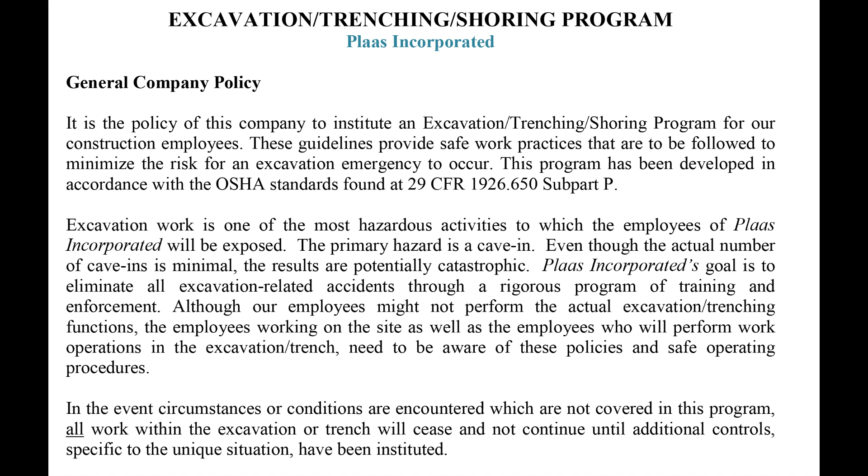Training and education. All job foremen, competent persons, and employees must understand their responsibilities regarding safety. Before beginning work, all employees will be trained in the recognition of potential hazards and precautions to be taken. This training will include safety requirements and procedures expected on the job site. Records of this training must be documented and retained in the Manager of Safety's office at Plaas Incorporated.

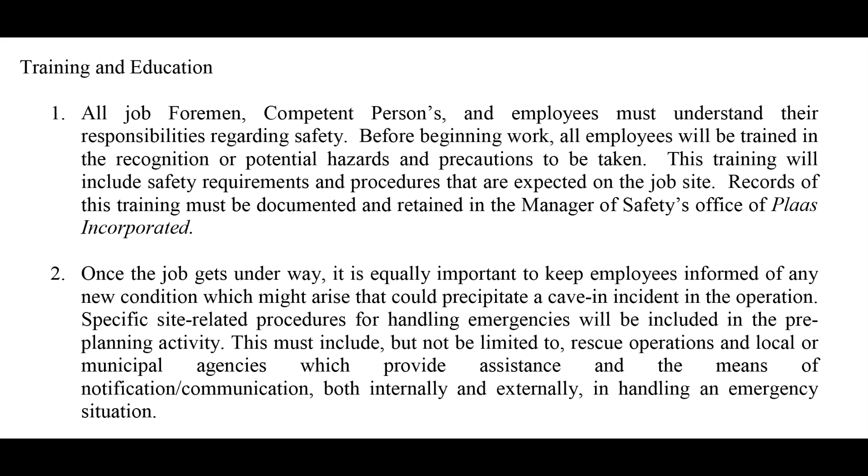Once the job gets underway, it is equally important to keep employees informed of any new condition which might arise that could precipitate a cave-in incident. Specific site-related procedures for handling emergencies will be included in the pre-planning activity. This must include, but not be limited to, rescue operations and local or municipal agencies which provide assistance, and the means of notification and communication, both internally and externally, in handling an emergency situation.

Competent person. The designated competent person should have and be able to demonstrate the following: training, experience, and knowledge of soil analysis, use of protective systems, and requirements of 29 CFR Part 1926 Subpart P.

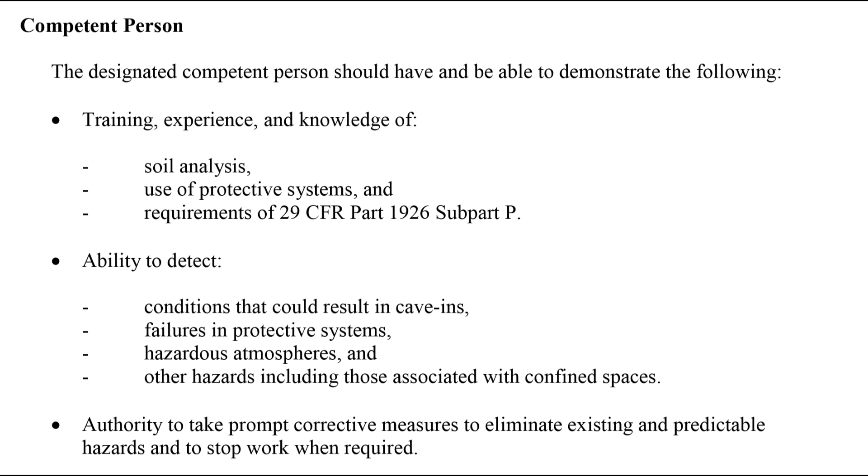Ability to detect conditions that could result in cave-ins, failures in protective systems, hazardous atmospheres, and other hazards, including those associated with confined spaces. Authority to take prompt corrective measures to eliminate existing and predictable hazards and to stop work when required. The competent person, as a tool to ensure all aspects of excavation trench safety are being addressed, may use the Plaas Incorporated Trench Excavation Review Daily Excavation Checklist and/or the Soil Analysis Checklist forms.

Site excavation trench inspections. Site excavation trench inspections shall be made by a competent person and should be documented. The following guide specifies the frequency and conditions requiring inspections: daily and before the start of each shift, as dictated by the work being done in the trench; after each rainstorm; after other events that could increase hazards, for example, snowstorm, windstorm, thaw, etc.

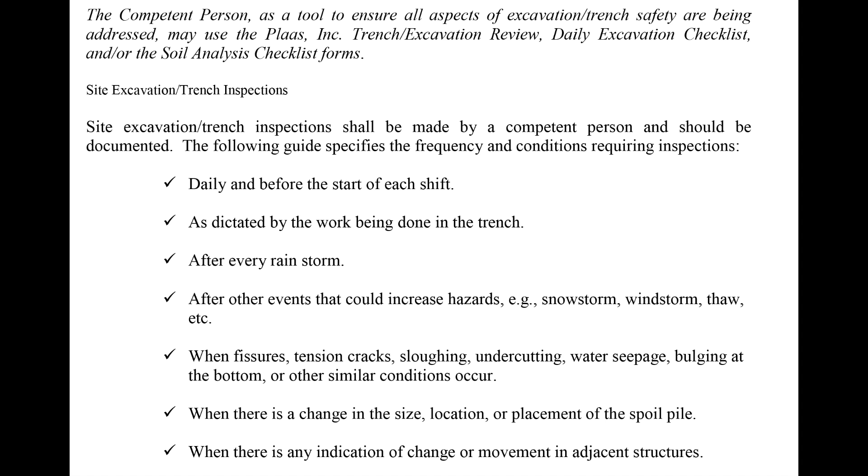When fissures, tension cracks, sloughing, undercutting, water seepage, bulging at the bottom, or other similar conditions occur; when there is a change in the size, location, or placement of the spoil pile; when there is any indication of change or movement in adjacent structures.

Soil classification. The types and composition of soil must be identified to determine what protective measures must be undertaken. Types and compositions such as wet soil, sandy soil, or ground that has been previously backfilled should be considered relatively unstable and deserving of strong support.

Strata considered hard rock can sometimes contain faults which make it unstable when disturbed by jackhammer activity or other types of vibrations, such as vehicular movement. Therefore, soil should be classified as stable rock and three classifications of soil.

Type A soil is a cohesive soil with an unconfined compression strength of 1.5 tons per square foot. The maximum allowable slope for excavations less than 20 feet deep is three-fourths to one, or 53 degrees. Examples: clay, silty clay, sandy clay, or clay loam.

Be cautious on soil that is fissured, subject to vibration, heavy traffic, pile driving, soil that has been previously disturbed, or soil that has been sloped.

Type B soil is cohesive with an unconfined compression strength greater than half a ton per square foot but less than 1.5 tons. The maximum allowable slope for excavations less than 20 feet deep is 1:1, or 45 degrees.

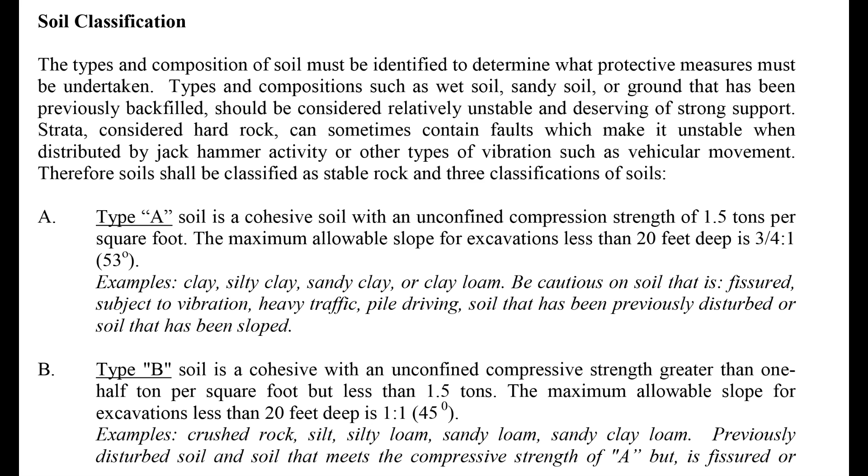Examples: crushed rock, silty loam, sandy loam, sandy clay loam, previously disturbed soil, and soil that meets the compressive strength of Type A but is fissured or subject to vibration. Dry rock that is not stable, or material that is part of a sloped system, fits this classification.

Type C soil is a granular soil with an unconfined compressive strength of half a ton per square foot or less. The maximum allowable slope for excavations less than 20 feet deep is 1.5:1, or 34 degrees.

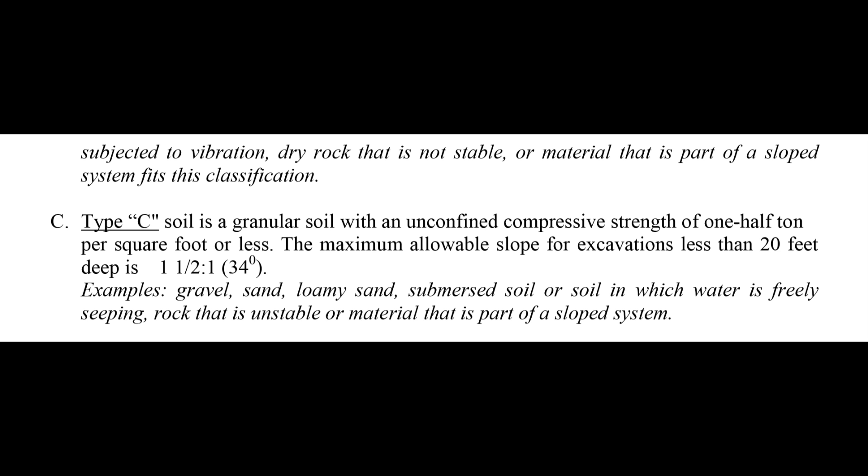Examples include gravel, sand, loamy sand, submerged soil, or soil in which water is freely seeping, rock that is unstable, or material that is part of a slope system.

Test equipment and methods for evaluating soil type. Many kinds of equipment and methods are used to determine the type of soil prevailing in an area. They are described below, starting with the pocket penetrometer.

Penetrometers are direct reading, spring-operated instruments used to determine the unconfined compressive strength of saturated cohesive soils. Once pushed into the soil, an indicator sleeve displays the reading. The instrument is calibrated in either tons per square foot (TSF) or kilograms per square centimeter (KPA). However, penetrometers have errors ranging from plus or minus 20 to 40%.

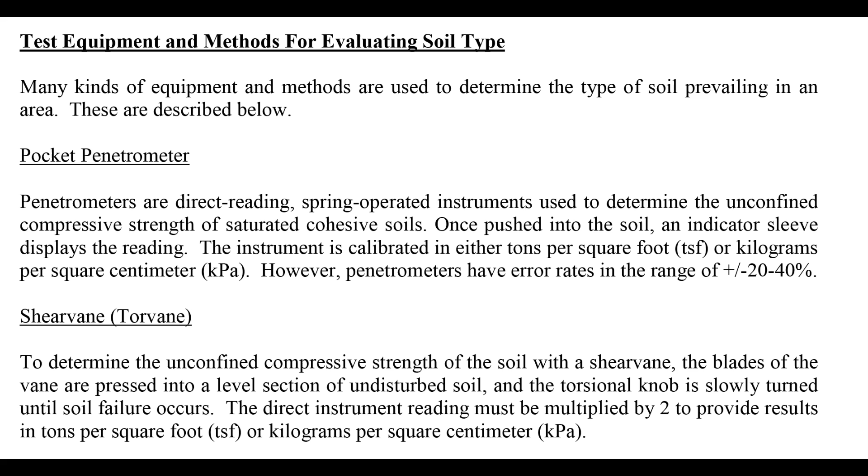Shearvane, or Torvane: to determine the unconfined compressive strength of the soil with a Torvane, the blades of the vane are pressed into the level section of undisturbed soil, and the torsional knob is slowly turned until soil failure occurs. The direct instrument reading must be multiplied by 2 to provide results in tons per square foot (TSF) or kilograms per square centimeter (KPA).

Dry strength test. Dry soil that crumbles freely or with moderate pressure into individual grains is granular. Dry soil that falls into clumps that subsequently break into smaller clumps, and the smaller clumps can be broken only with difficulty, is probably clay in combination with gravel, sand, or silt. If the soil breaks into clumps that do not break into smaller clumps and can be broken only with difficulty, the soil is considered unfissured unless there is visual indication of fissuring.

Plasticity or wet thread test. This test is conducted by molding a moist sample of soil into a ball and attempting to roll it into a thin thread approximately 1/8 inch (3 millimeters) in diameter by 2 inches (50 millimeters) in length. The soil sample is held by one end. If the sample does not break or tear, the soil is considered cohesive.

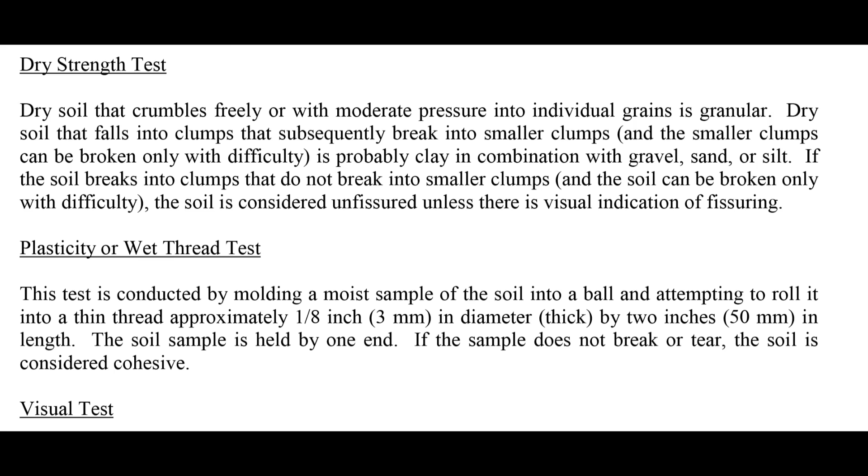Visual test. A visual test is a qualitative evaluation of conditions around the site. The entire excavation site is observed, including the soil adjacent to the site and the soil being excavated. If the soil remains in clumps, it is cohesive. If it appears coarse-grained, sand, or gravel, it is considered granular. The evaluator also checks for any signs of vibration.

During a visual test, the evaluator should check for crack line openings along the failure zone that would indicate tension cracks, look for existing utilities that would indicate the soil has previously been disturbed, and observe the open side of the excavation for indications of layered geological structuring. The evaluator should also look for signs of bulging, boiling, or sloughing, as well as signs of surface water seeping from the sides of the excavation or from the water table.

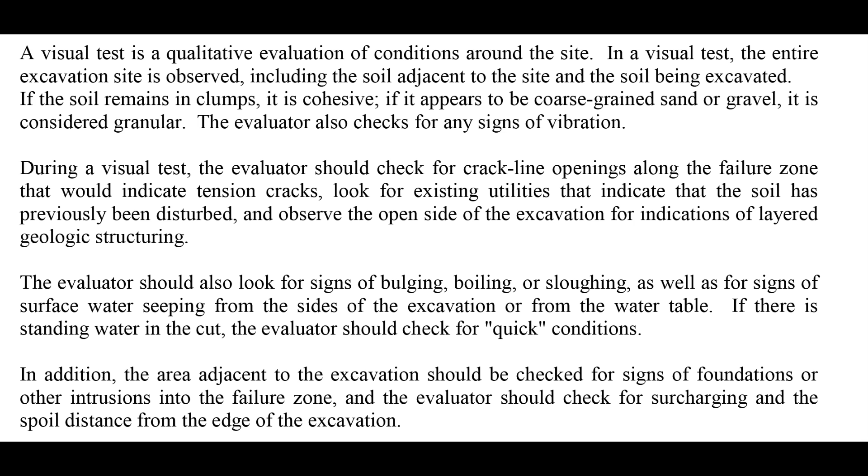If there is standing water in the cut, the evaluator should check for quick conditions. In addition, the area adjacent to the excavation should be checked for signs of foundation or other intrusions into the failure zone, and the evaluator should check for surcharging and the spoil distance from the edge of the excavation.

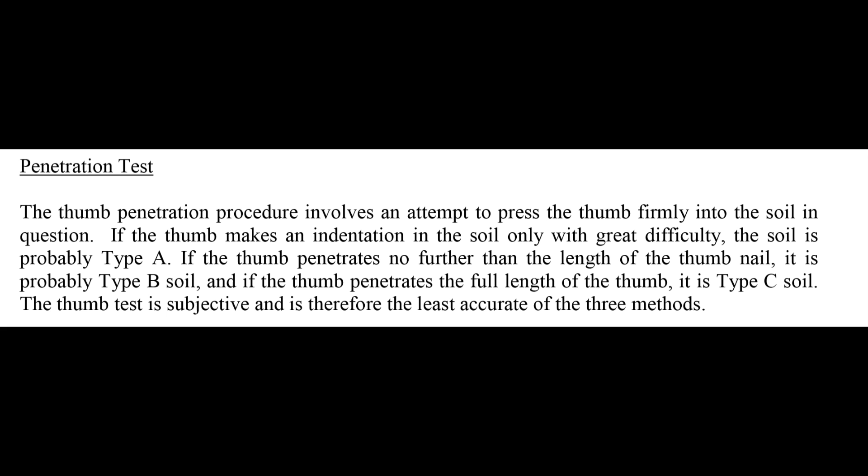Penetration test: the thumb penetration procedure involves an attempt to press the thumb firmly into the soil in question. If the thumb makes an indentation in the soil only with great difficulty, the soil is probably type A. If the thumb penetrates no further than the length of the thumbnail, it is probably type B soil. If the thumb penetrates the full length of the thumb, it is type C soil. The thumb test is subjective and therefore the least accurate of the three methods.

Excavation safety considerations. Each excavation and trenching job presents unique problems. Prior to excavation work activities beginning on a job site, the following items and conditions are to be addressed. Surface and groundwater: the amount of water, either surface or contained within the soil, can affect the cohesiveness of the material. It is imperative that the water table and its extreme fluctuations be determined prior to starting the operation.

Underground installations. The location of underground installations such as sewer, water, fuel, gas and oil, telephone, and electric lines will be determined before starting the trench or excavation work. It will be the competent person's responsibility to verify that utilities are marked. Hand digging will be required when in close proximity to utilities. Utility and service companies plus local officials will be contacted prior to the job to locate and mark all underground installations.

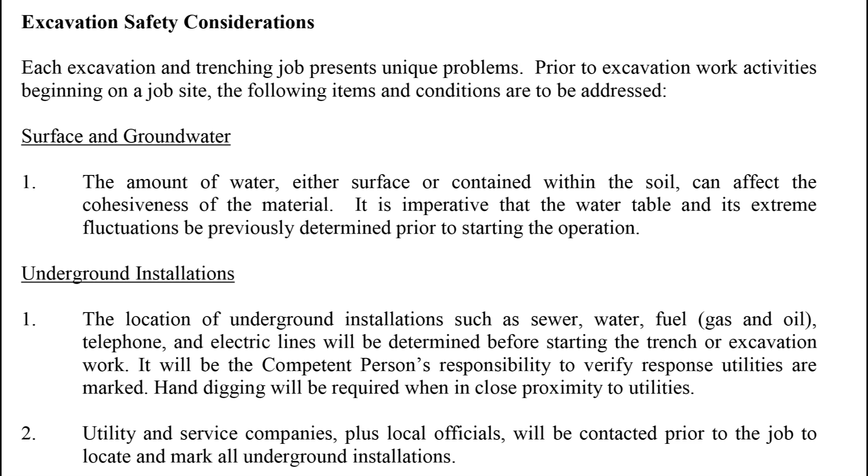Underground installations shall be protected, supported, or removed to safeguard employees.

Climate and weather conditions: changing weather and climate can drastically alter conditions encountered in excavation and trenching work. Potentials for change in weather and climate must be considered, including precipitation, temperatures, flooding, and any type of extreme weather conditions.

Physical location of dig: the nearness, type, and condition of any structures, installations, or operations will be determined prior to starting a job. If a potential for damage to adjacent structures is suspect, additional safeguards and procedures will be initiated to provide utmost protection.

Traffic conditions: through job site observation, the type, volume, and peak hours of traffic flow adjacent to the dig will be determined. The close proximity of passing vehicles can cause vibrations and sudden shock, which could contribute to cave-ins by loosening the soil.

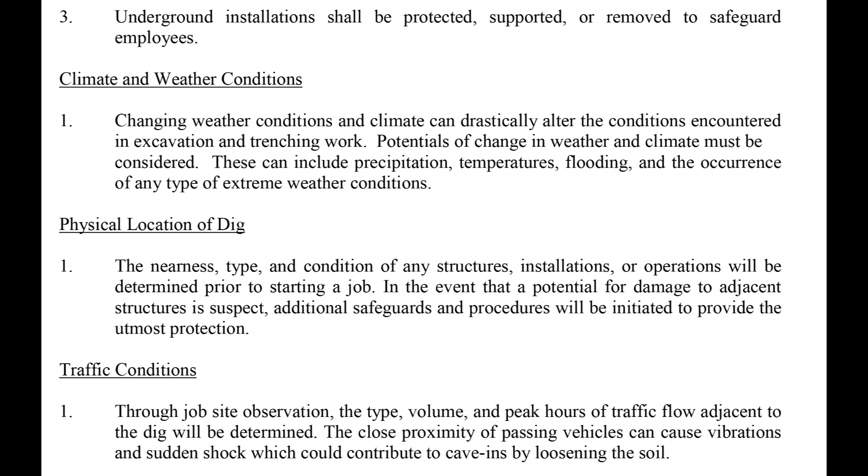General information: in the event these pre-planning activities identify a unique hazard to the job at hand, specific loss prevention procedures will be developed, put in writing, and included as an addendum to the requirements set forth in this section of the Safety Policy Manual.

Spoils placement. Temporary spoil must be placed no closer than 2 feet (0.61 meters) from the surface edge of the excavation, measured from the nearest base of the spoil to the cut. This distance should not be measured from the crown of the spoil deposit. This requirement ensures that loose rock or soil from the temporary spoil will not fall on employees in the trench.

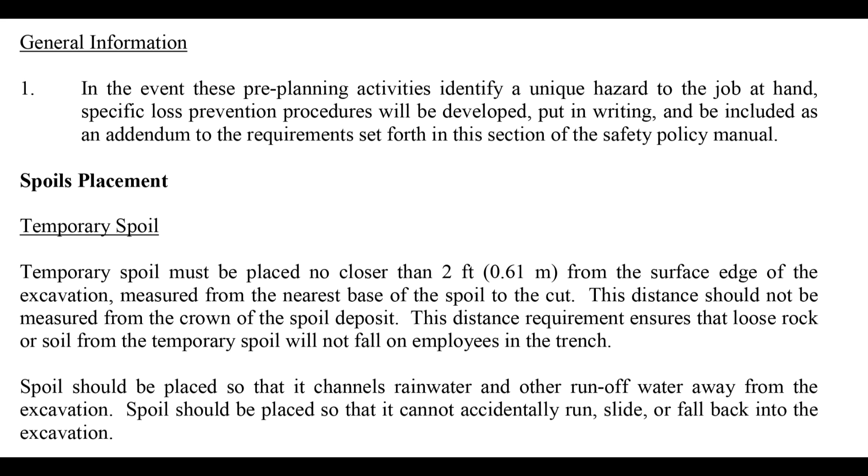Spoil should be placed so that it channels rainwater or other runoff water away from the excavation, and so that it cannot accidentally run, slide, or fall back into the excavation.

Permanent spoil should be placed some distance from the excavation. Permanent spoil is often created where underpasses are built or utilities are buried. Improper placement, i.e., insufficient distance from the working excavation, can cause an excavation to be out of compliance with the horizontal to vertical ratio requirement. This can usually be determined through visual observation. Permanent spoil can change undisturbed soil to disturbed soil and dramatically alter slope requirements.

OSHA health and safety considerations. Surface crossing of trenches should be discouraged. However, if trenches must be crossed, such crossings are permitted only under certain conditions.

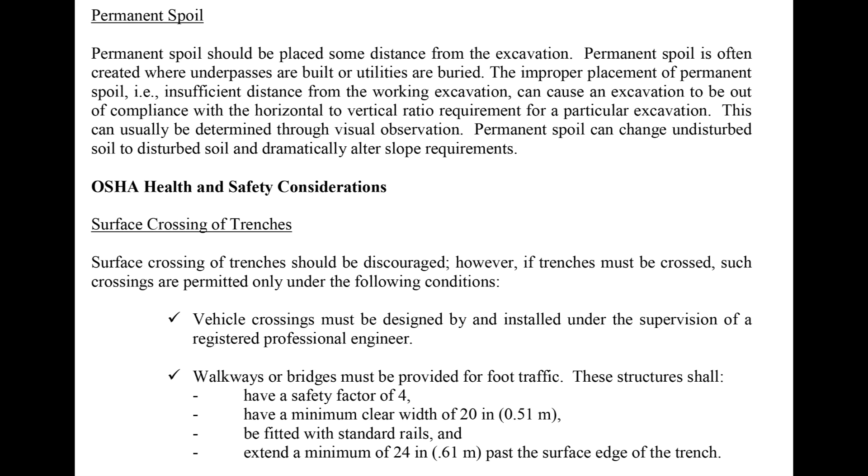Vehicle crossings must be designed by and installed under the supervision of a registered professional engineer. Walkways or bridges must be provided for foot traffic. These structures shall have a safety factor of 4, have a minimum clear width of 20 inches (0.51 meters), be fitted with standard rails, and extend a minimum of 24 inches (0.61 meters) past the surface edge of the trench.

Ingress and egress: access to and exit from the trench are required. Trenches 4 feet or more in depth should be provided with a fixed means of egress. Spacing between ladders or other means of egress must be such that a worker will not have to travel more than 25 feet laterally to the nearest means of egress.

Ladders must be secured and extend a minimum of 36 inches (0.9 meters) above the landing. Metal ladders should be used with caution, particularly when electric utilities are present.

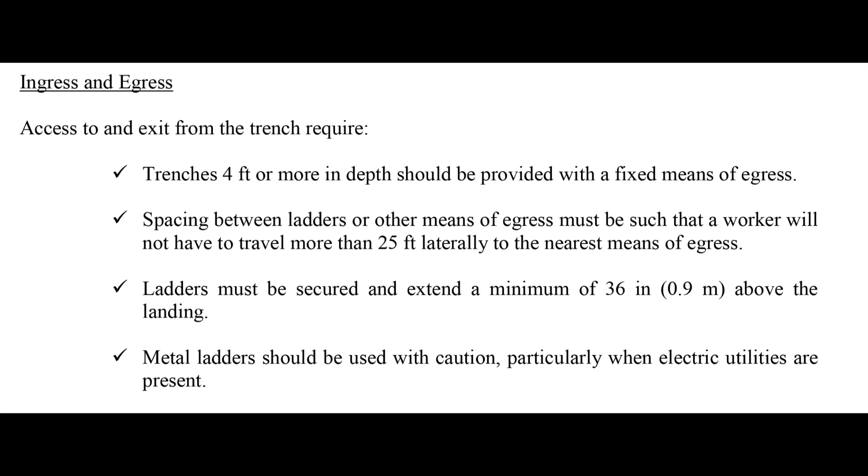Exposure to vehicles: procedures to protect employees from being injured or killed by vehicle traffic include providing employees with, and requiring them to wear, warning vests or other suitable garments marked with or made of reflectorized or highly visible materials, and requiring a designated trained flag person along with signs, signals, and barricades when necessary.

Exposure to falling loads: employees must be protected from loads or objects falling from lifting or digging equipment. Procedures designed to ensure their protection include employees not being permitted to work under raised loads, and employees being required to stand away from equipment that is being loaded or unloaded.

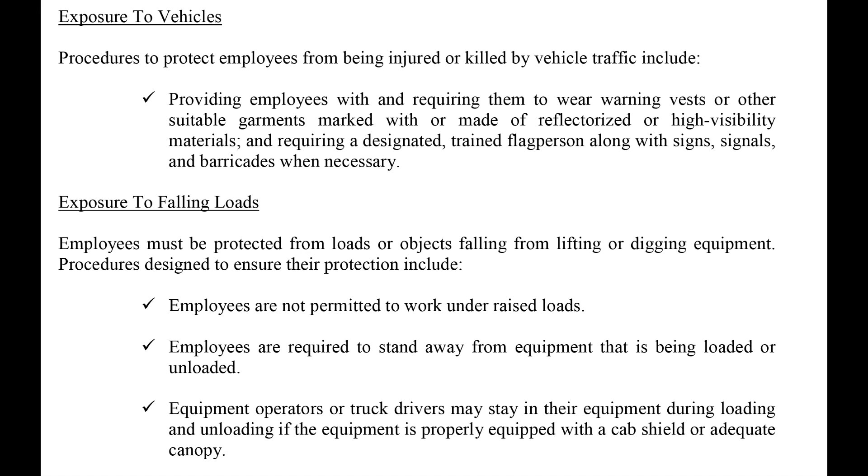Equipment operators or truck drivers may stay in their equipment during loading and unloading if the equipment is properly equipped with a cab shield or adequate canopy.

Warning systems for mobile equipment: the following steps should be taken to prevent vehicles from accidentally falling into the trench. Barricades must be installed where necessary. Hand or mechanical signals must be used as required. Stop logs must be installed if there is a danger of vehicles falling into the trench.

Soil should be graded away from the excavation. This will assist in vehicle control and channeling of runoff water.

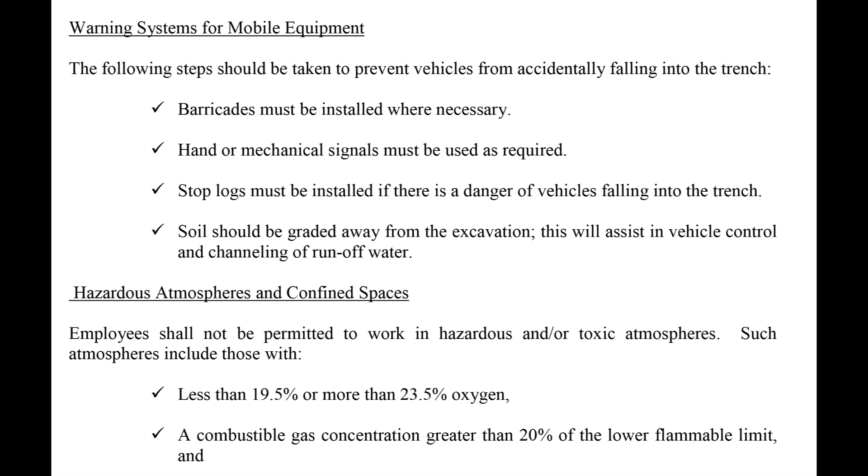Hazardous atmospheres and confined spaces: employees shall not be permitted to work in hazardous and/or toxic atmospheres. Such atmospheres include those with less than 19.5% or more than 23.5% oxygen, or a combustible gas concentration greater than 20% of the lower flammable limit.

Considerations also include hazardous substances that exceed those specified in the threshold limit values for airborne contaminants established by ACGIH, the American Conference of Governmental Industrial Hygienists.

All operations involving such atmospheres must be conducted in accordance with OSHA requirements for occupational health and environmental controls, see Subpart D of 29 CFR 1926. For personal protective equipment and life-saving equipment, see Subpart E of 29 CFR 1926. Engineering controls, such as ventilation, and respiratory protection may be required.

Testing for atmospheric contaminants: testing should be conducted before employees enter the trench and should be done regularly to ensure that the trench remains safe. The frequency of testing should be increased if equipment is operating in the trench, or if welding, cutting, or burning is being done in the trench.

Employees required to wear respiratory protection must be trained, fit tested, and enrolled in a respiratory protection program. Some trenches qualify as confined spaces. When this occurs, compliance with the confined space standard is also required.

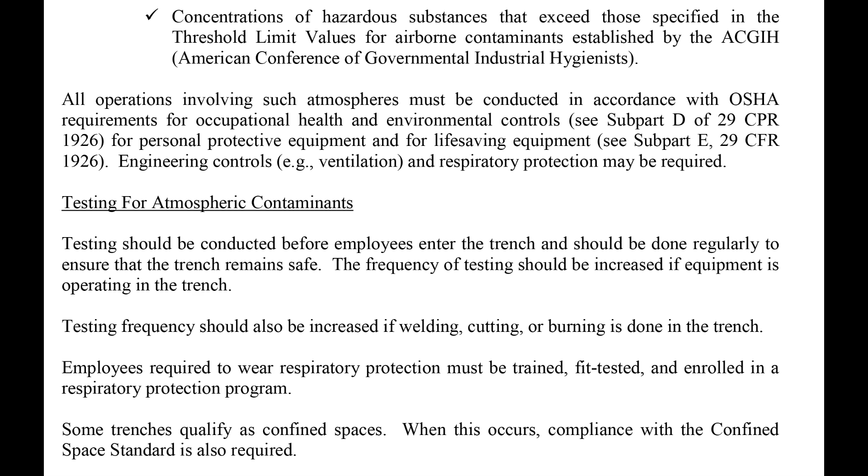Emergency rescue equipment is required when a hazardous atmosphere exists or can reasonably be expected to exist. Requirements are as follows: respirators must be of the type suitable for that exposure. Employees must be trained in their use and a respirator program must be instituted.

Attended at all times, lifelines must be provided when employees enter bell-bottom pier holes, deep confined spaces, or similar hazards. Employees who enter confined spaces must be trained.

Standing water and water accumulation. Methods for controlling standing water and water accumulation must be provided and should consist of the following if employees are permitted to work in the excavation.

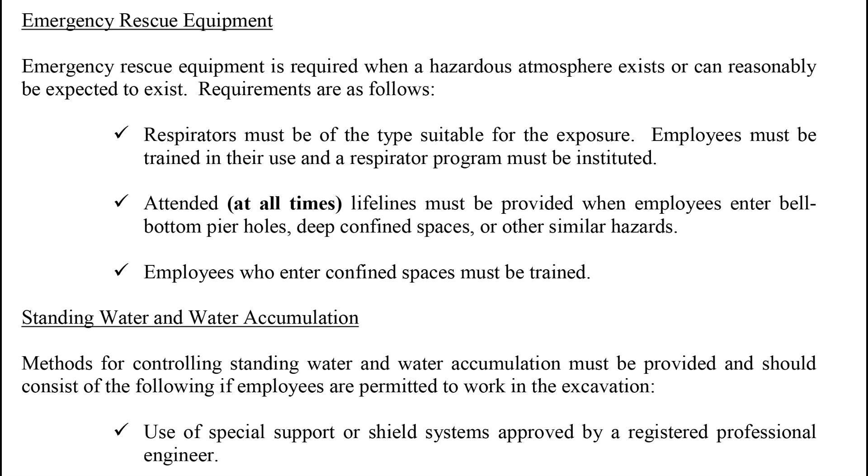Use of special support or shield systems approved by a registered professional engineer. Water removal equipment, i.e. well pointing, used and monitored by a competent person. Safety harness and lifelines used in conformance with 29 CFR 1926.104.

Surface water diverted away from the trench. Employees removed from the trench during rainstorms. Trenches carefully inspected by a competent person after each rain and before employees are permitted to re-enter the trench.

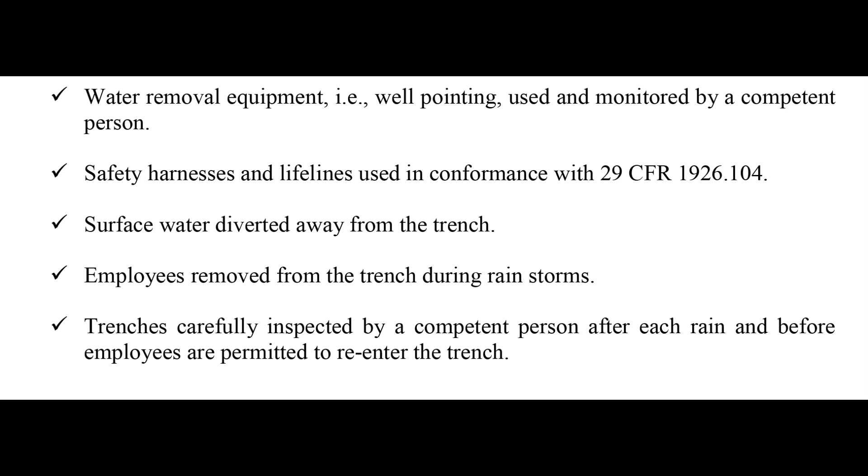On-site safety practices. Once excavation or trenching begins, specific safety practices are necessary. This includes daily inspections of the excavation or trenching project to detect hazards and to correct job site situations before cave-ins or other accidents occur, performed by the competent person.

Safety meetings will be held on at least a weekly schedule by the job foreman. The job foreman will also be responsible for the continuing inspection of the work site, conformance to the personal protective equipment requirements of the job, and the safe performance of work on the project.

Federal safety and health standards define a trench as a narrow excavation in which the depth is greater than the width and where the width is not greater than 15 feet. An excavation is any mechanically made cavity or depression in the earth's surface.

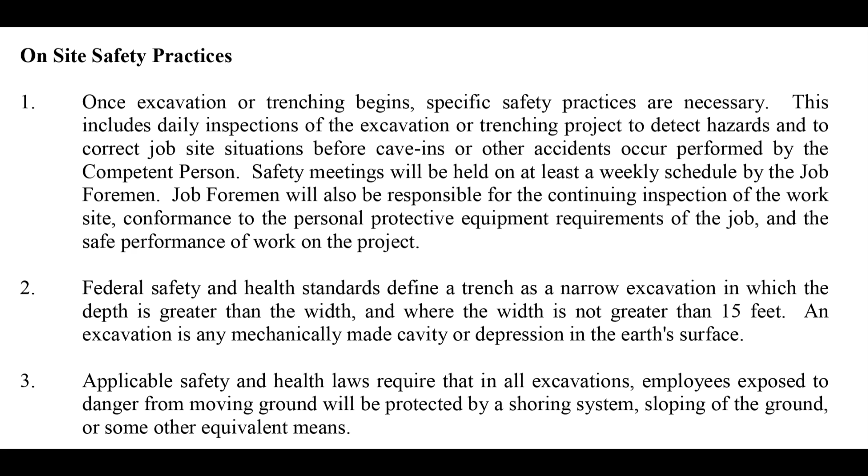Applicable safety and health laws require that all excavations with employees exposed to danger from moving ground will be protected by a shoring system, sloping of the ground, or some other equivalent means.

It is further required that all trenches over 4 feet deep in either hard or compact or soft and unstable soil be sloped, shored, sheeted, braced, or otherwise supported, and that trenches less than 4 feet in depth also be effectively protected when hazardous ground movement may be expected.

Protection can be provided to workers in a trench or excavation by sloping the sides of the cut to the angle of repose. This is defined as the greatest angle above the horizontal plane at which a material will lie without sliding. The angle of repose varies with different kinds of soil and must be determined on each individual project or job site.

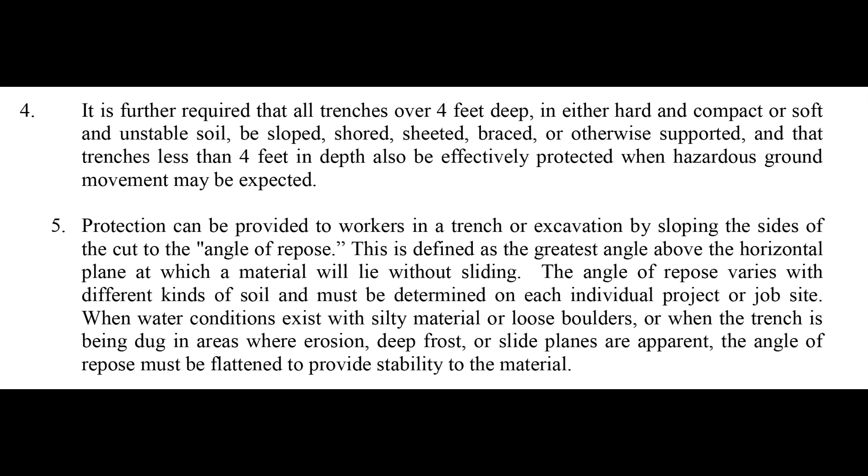When water conditions exist with silty material or loose boulders, or when the trench is being dug in areas where erosion, deep frost, or slide planes are apparent, the angle of repose must be flattened to provide stability to the material. Other methods of providing protection to workers in a trench or excavation is by the installation of shoring or sheeting.

This can be either tightly placed timber shores, bracing, trench jacks, piles, or other material installed in a manner strong enough to resist the pressure surrounding the excavation.

In addition to this on-the-site construction of protection, a prefabricated trench shield, which is a movable structure composed of steel plates welded to a heavy steel frame, may be utilized. Timber, aluminum, or other suitable construction may also be used.

Federal standards permit the use of a trench shield as long as the protection it provides is equal to or greater than the protection that would be provided by the appropriate shoring system, where personnel are required to enter and work in an excavation.

The excavated material must be stored or retained at least 2 feet or more from the edge of the excavation. Where trenches cross gas mains, sewers, or soil saturated with organic material, artificial ventilation may be necessary.

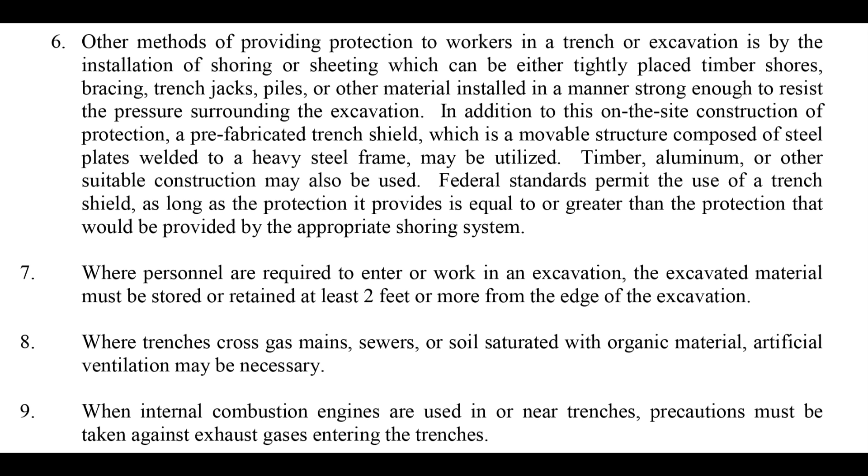When internal combustion engines are used in or near trenches, precautions must be taken against exhaust gases entering the trenches.

Whenever a support system is used, it must also always be applied by starting from the top of the trench or excavation and working down.

During installation of the shoring, care must be taken to place the cross beams or trench jacks in a true horizontal position and to space them vertically at appropriate intervals. The braces also must be secured to prevent sliding, falling, or kickouts.

Prior to opening an excavation, effort will be made to determine whether underground installations, for example sewer, telephone, water, fuel, electrical lines, will be encountered, and if so, where such underground installations are located.

When the excavation approaches the estimated location of such an installation, the exact location will be determined, and when it is uncovered, proper supports will be provided for the existing installation. Utility companies will be contacted and advised of proposed work prior to the start of actual excavation.

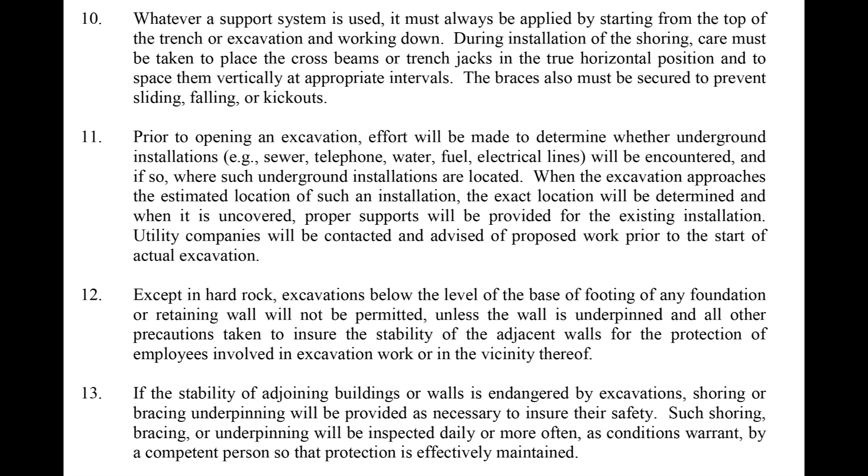Except in hard rock, excavations below the level of the base of footing of any foundation or retaining wall will not be permitted unless the wall is underpinned and all other precautions are taken to ensure the stability of adjacent walls for the protection of employees involved in excavation work or in the vicinity thereof. If the stability of adjoining buildings or walls is endangered by excavation, shoring, or bracing, underpinning will be provided as necessary to ensure their safety. Such shoring, bracing, or underpinning will be inspected daily, or more often as conditions warrant, by a competent person so that protection is effectively maintained.

Excavation stresses and deformations. A number of stresses and deformations can occur in an open cut or trench. Examples of these include tension cracks, which usually form at the top.

Tension cracks. Tension cracks usually form at a horizontal distance from 0.5 to 0.75 times the depth of the trench, measured from the top of the vertical face of the trench.

Sliding. Sliding or sluffing may occur as a result of tension cracks. Toppling. In addition to sliding, tension cracks may cause toppling. Toppling occurs when the trench's vertical face shears along with the tension crack line and topples into the excavation.

Subsidence and bulging. An unsupported excavation can create an unbalanced stress in the soil, which in turn causes subsidence at the surface and bulging of the vertical face of the trench. If uncorrected, this condition can cause face failure and entrapment of workers in the trench.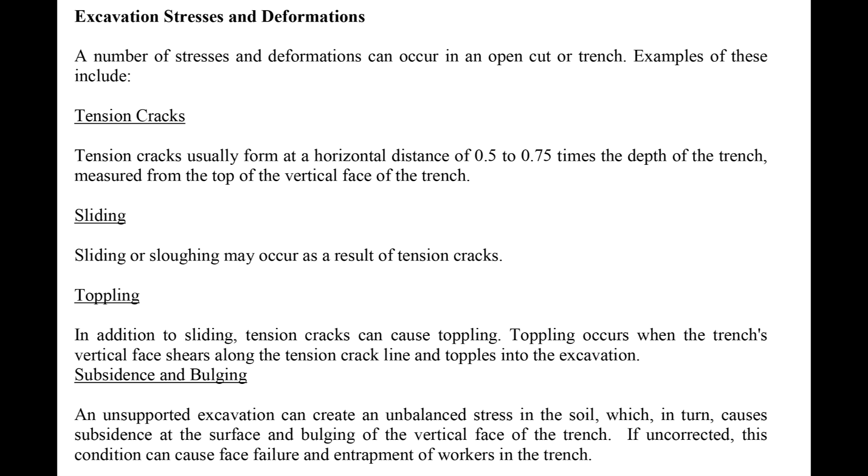Heaving or squeezing. Bottom heaving or squeezing is caused by a downward pressure created by the weight of adjoining soil. This pressure causes a bulge in the bottom of the cut. Heaving and squeezing can occur even when shoring or shielding has been properly installed.

Boiling. Boiling is evidenced by an upward water flow into the bottom of the cut. A high water table is one of the causes of boiling. Boiling produces a quick condition in the bottom of the cut and can occur even when shoring or trench boxes are used.

Unit weight of soils refers to the weight of one unit of a particular soil. The weight of soil varies with types and moisture content. 1 cubic foot of soil can weigh from 110 pounds to 140 pounds or more. 1 cubic meter, or 35.3 cubic feet, of soil can weigh more than 3,000 pounds.

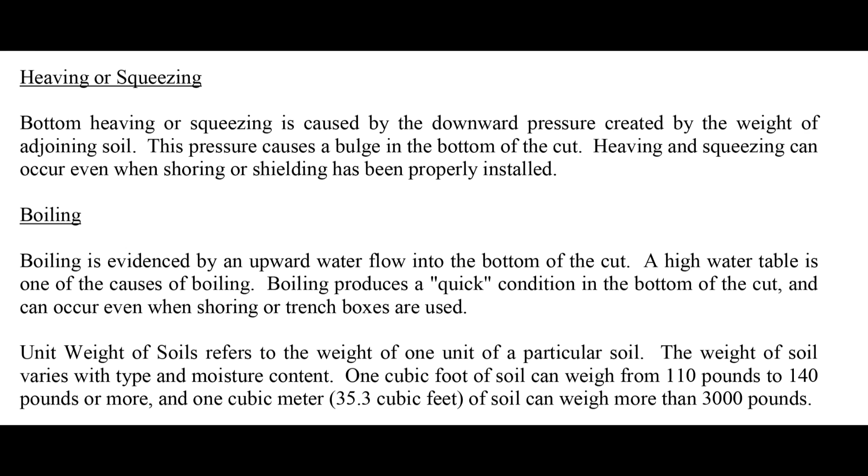Trench rescue. Scene management. The following steps should be taken if a trench cave-in occurs on the job. The information in these steps will need to be relayed to the fire department and others involved in the rescue attempt. Move all vehicles away from the scene and do not allow vehicles entering the scene closer than 100 feet. Have outside traffic park at least 300 feet away from the scene and keep bystanders back 300 feet. Find and secure a responsible witness.

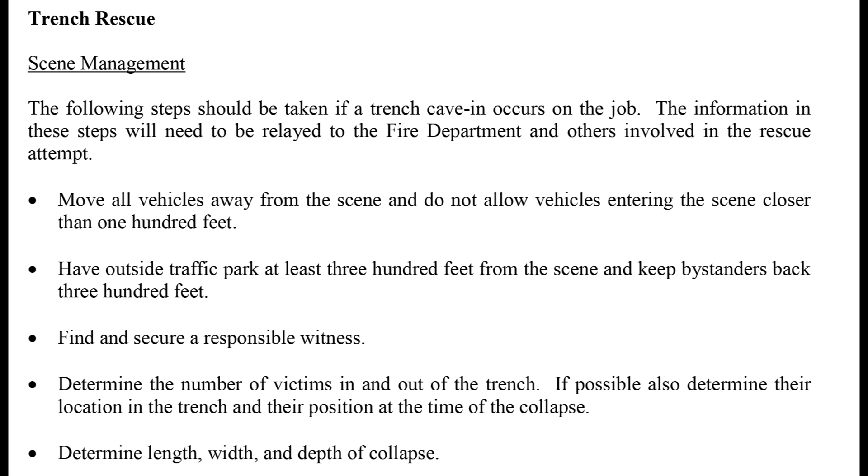Determine the number of victims in and out of the trench. If possible, also determine their location in the trench and their position at the time of the collapse. Determine length, width, and depth of the collapse. Determine how long ago the collapse occurred. Determine soil conditions and check the area for additional collapse potential.

Check for cracks in soil, bulges in trench walls, location of soil pile, sources of vibration, etc. Check for other hazards: water, sewer, gas, electric, etc. Determine the risk to rescuers versus the time element. Will the victim be alive when the rescue is complete? Is there a chance for survival?

Rescue guidelines. Notify police and fire departments immediately. Relay pertinent information from scene management to the authorities. Never enter a trench for a rescue that is more than 5 feet deep and unshored or unsloped. Never enter a trench for a rescue that is 4 feet deep and is unshored, unsloped, and in unstable soil.

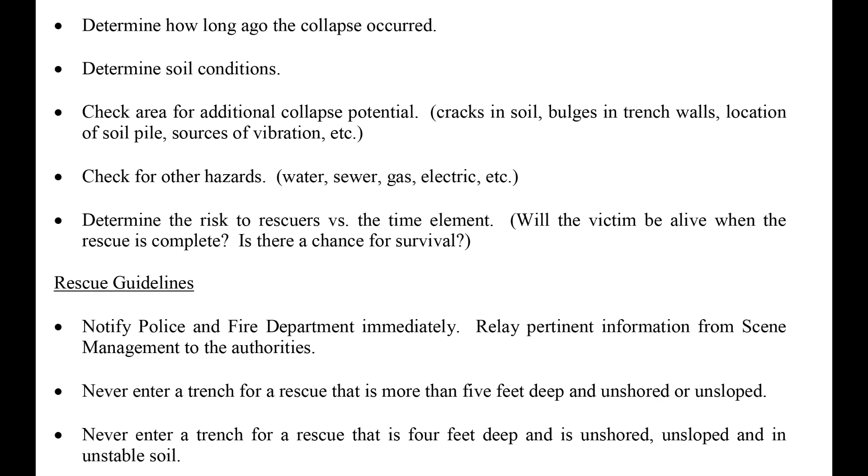Planning ahead may save lives. Have shoring on site if you will be excavating 4 feet or more in depth and you will have people working in the trench. On large jobs, know where the shoring is so it can be brought into the site immediately. Remember, additional cave-ins follow within minutes or seconds of the initial cave-in. Do not become a victim by jumping into the trench after the initial cave-in and before the trench is stabilized.

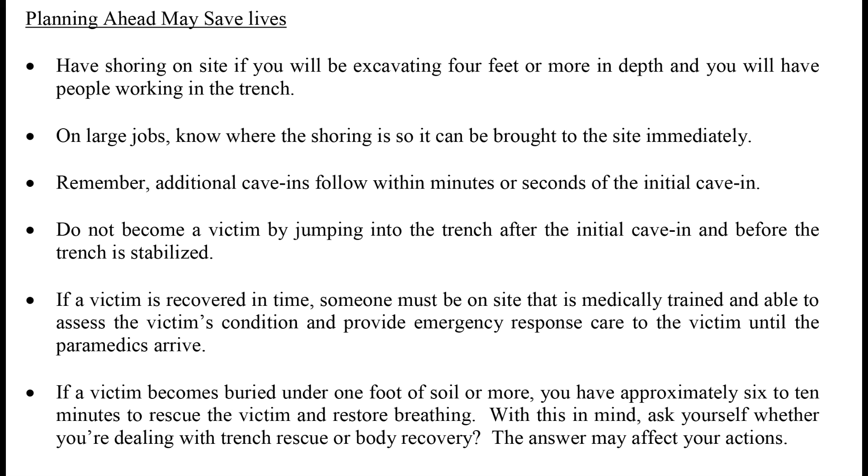If a victim is recovered in time, someone must be on site who is medically trained and able to assess the victim's condition and provide emergency response care until the paramedics arrive. If a victim becomes buried under 1 foot of soil or more, you have approximately 6 to 10 minutes to rescue the victim and restore breathing. With this in mind, you must ask yourself whether you're dealing with a trench rescue or a body recovery. This answer may affect your actions.